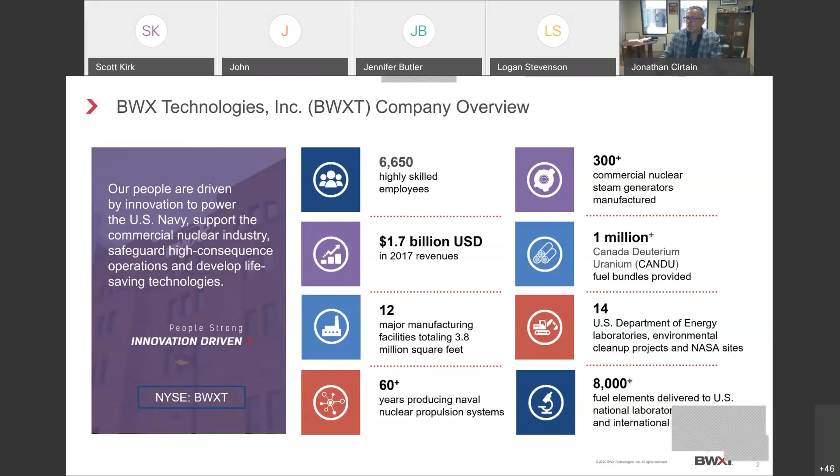So, not often do we get the opportunity to speak about this, but over the course of our history, not only have we been making nuclear reactors for the U.S. Navy for 60 years, but we have about 40 different nuclear reactor designs that we've developed over the course of that same period. Some of these were actually in submarines, like the first Rickover submarine, the USS Nautilus.

But there are also a variety of other reactors, including, Scott, I don't know if you knew this, but we had 3 reactors here in Lynchburg, Virginia, the CX series that we operated at the Mount Athos facility. We've developed designs for a variety of different reactors, both commercial and government use.

And a couple of those in particular I'm going to talk about today: Space Nuclear Thermal Propulsion System, the SNTP program, SNAP 100, JIMO, or the Jupiter Icy Moons, NASA's Project Prometheus reactor system. And we've done a variety of other things for reactors as well, including the manufacture of fuels for the Advanced Test Reactor at Idaho National Lab, or the High Flux Isotope Reactor at Oak Ridge, things that we have as ongoing enterprises today.

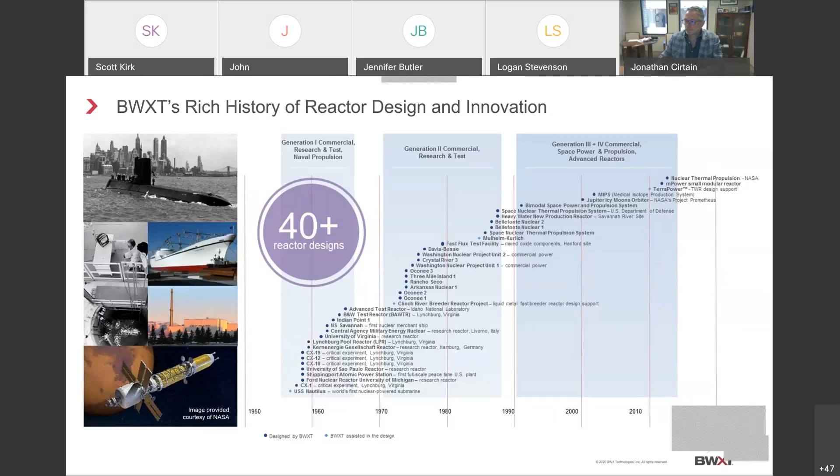So I think with that, I'm going to provide a brief history of what BWXT has done in terms of spaceflight systems since we really got into the business with Project Mercury, one of the first rocket launches to successfully reach space back in 1959. With Wernher von Braun in the early 60s, we started the development of the design systems for the NERVA test program and Project Rover. Those are 2 separate activities within the U.S. government, and we were a participant in both.

BWXT predominantly makes big round things for nuclear reactors, and we contributed big round thing manufacturing to both the Apollo space program and also Skylab. So we've been building hardware for space for quite some time, something that we don't get to take full marketing value for very often. So I'm pretty excited to get to tout those experiences to you today.

We've had a variety of different contracts with NASA for the design of thermal propulsion systems for space. One in 1987, another one in 2003, and then our most recent as part of the NASA Nuclear Thermal Propulsion Reactor Design Concept, which started within the Space Technology Mission Directorate at NASA as part of a game-changing development program. This is a funding opportunity within Space Technology's Mission Directorate. That's a GCD, Game Changing Development. We've been working on that since 2017, and that's an ongoing activity for us.

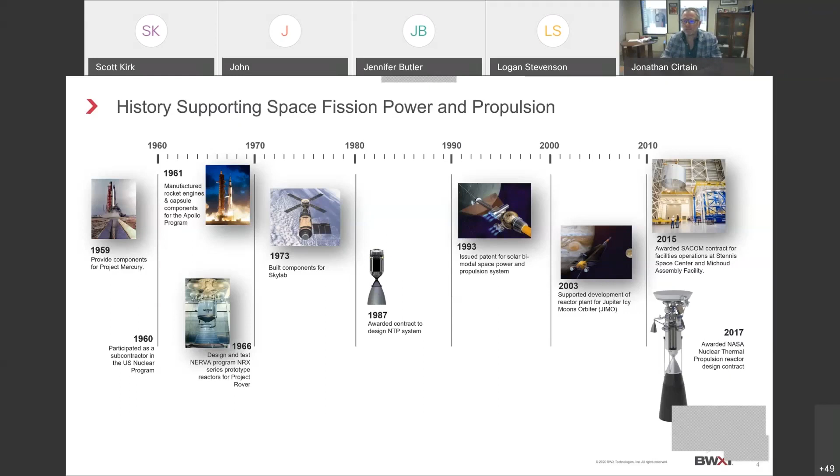Right now, we're making fuel for that effort, and I'll talk a little bit more about the current iteration of nuclear thermal propulsion as NASA sees it in my following slides. So, just the need for space nuclear propulsion.

So one of the things that didn't really come out in my bio is my background in physics is really astrophysics, where I had the opportunity to study the sun and its atmosphere during my days within NASA. And something that doesn't come across that often for public consumption is that the sun actually has variability. It has its own seasons, if you will, over an 11-year cycle, where there's variability in the number of sunspots on the sun's surface. Those sunspots are representative of the magnetic field of the sun, and that magnetic field emergence actually drives what's known as space weather.

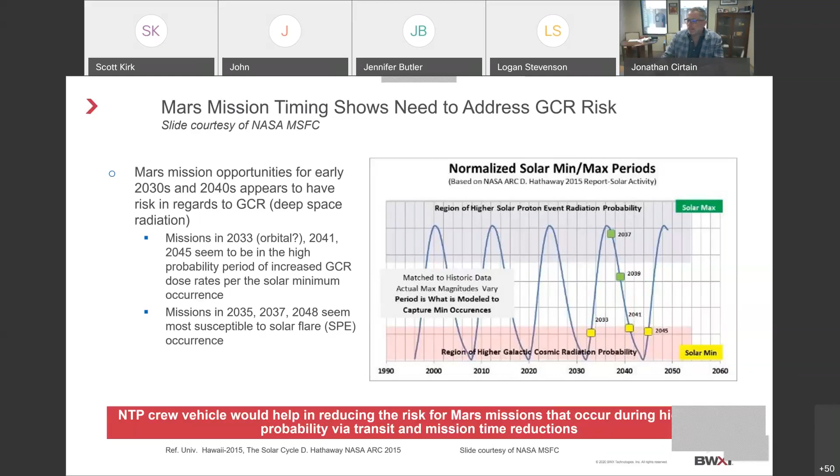Another reason, probably evident from this plot, but I'll go into it in detail. Another reason for a nuclear thermal or electric propulsion system is launch windows, right? Being able to launch on the day that you like to plan. In the case of a nuclear thermal propulsion system, you might need to plan 5 or 8 years in advance, maybe even a decade in advance of the launch window, given the proximity of Mars to Earth. The launch windows are fairly narrow.

If you watch the Perseverance launch, they only had a few days that they could launch that vehicle. So they really had to hit their target, be ready well in advance. They had to hope that the weather worked out. And so the launch windows are fairly narrow for these interplanetary launch opportunities. And as the window grows, the amount of propellant required also grows because of the interchange between the gravity wells between the two planets, launch opportunity, transit times, distances between the planets. All of those things increase the amount of propellant required.

And at day 0 of launch, if you are actually to hit your target window, you need about twice the chemical propellant, twice the fuel for a chemical rocket versus a nuclear rocket. But as the time period past that 0-day launch window grows, there's a slow growth in fuel requirements for a nuclear rocket, but a growing geometric requirement for fuel for a chemical rocket. And you can see at about day 50, day 60, it really starts to become a fairly rapid growth in chemical fuel required versus nuclear fuel required.

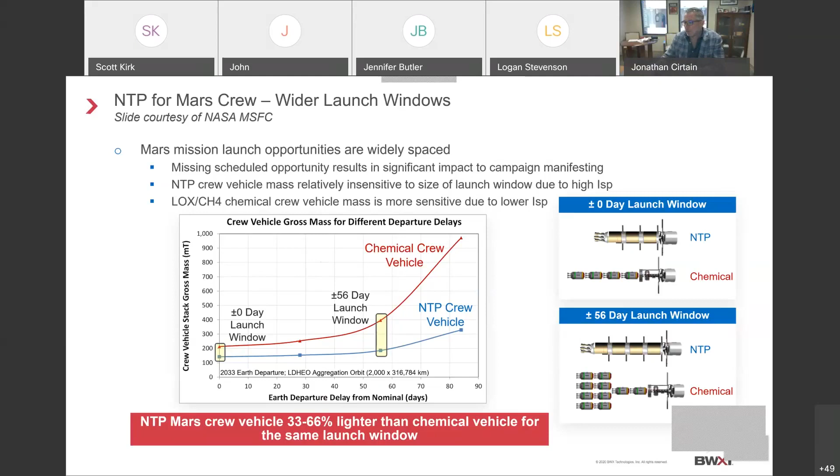So again, another rationale for having a nuclear propulsion system is the expanse in launch window opportunity that advanced rocket system affords you. Another reason for that is safety, abort, the ability to turn around if things don't go well. Most incidents occur during ascent, during the first phases of operation of the system. And it'd be really great if in the event something went wrong, you could turn around. But for a chemical system, you have about 5 days, 5 days out of 210 that you can call do-over and turn around and go back to Earth. But for an NTP system, you're roughly halfway into the transit where you can still turn around and safely make your way back to Earth.

There are a variety of different reasons why you might need to abort. Maybe the two crew members just don't get along well. The likelihood of that's probably low, but other things like damage to the spacecraft because of debris events or ECLS impacts, ECLS being the environmental and life support systems on board the spacecraft. For a variety of different reasons, you might have an issue with life support systems and need to turn around, and the consequences of all of those rationales for turning around are pretty deleterious for such a long duration mission. And so having the opportunity to abort is pretty important. So a much more substantial abort capability with nuclear thermal propulsion.

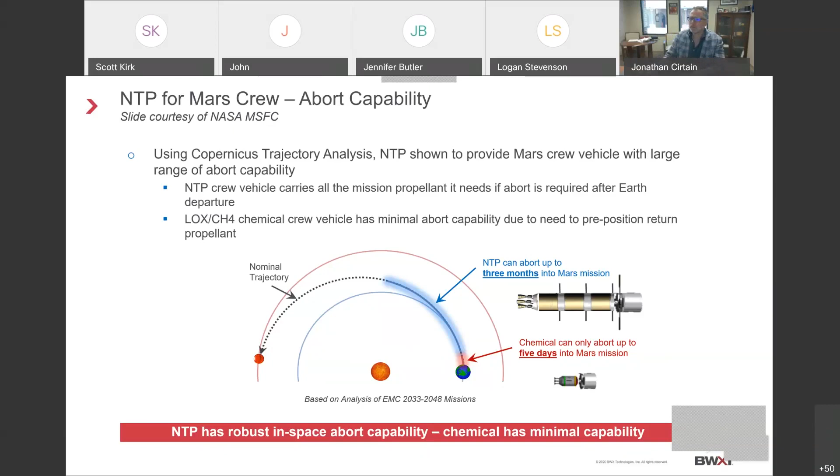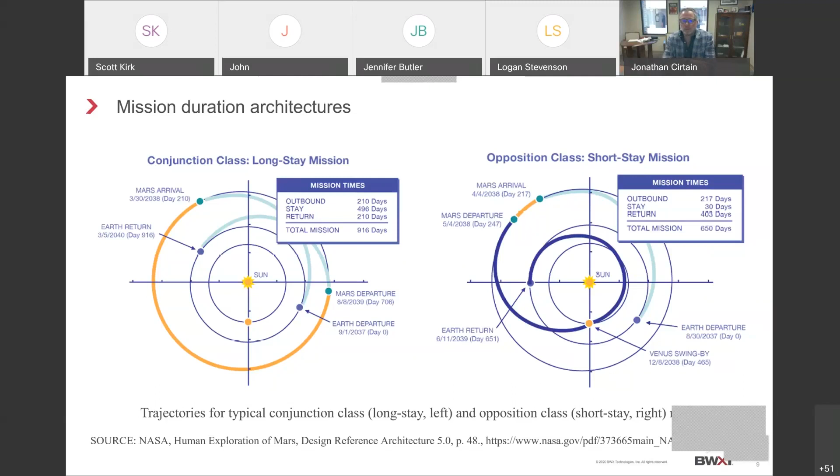On top of just the reactor concept development, we've also been looking at licensing support. So what would be necessary for licensing the manufacturing of the fuel, what's required to launch a nuclear reactor system from Cape Canaveral, what's necessary for a ground test, if we were going to test this rocket either at the Stennis Space Center in Mississippi or out in Idaho at the Idaho National Lab. In either of those instances, a license would be required to operate that reactor for those ground tests. We've been working on fuel and core fabrication development.

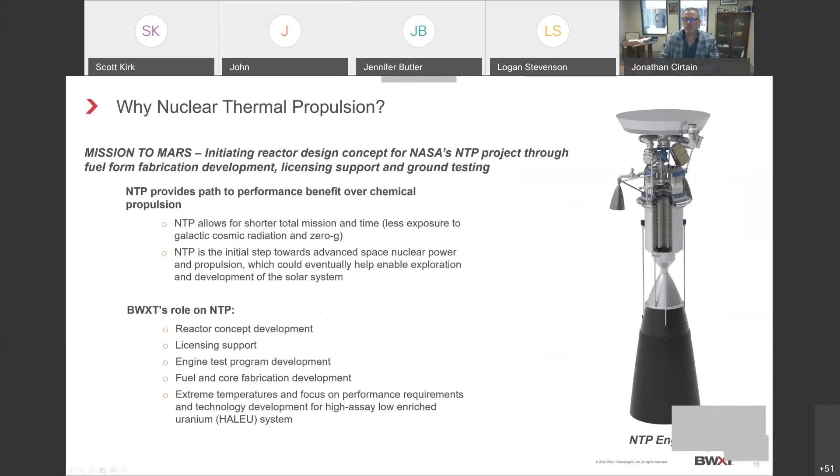Going back again a slide, it exits the reactor core and is pushed through this nozzle. So the pressure differential from above the nozzle to inside the aft skirt creates substantial increases in thrust. And so you get a high thrust, high velocity exhaust gas pushed out through that nozzle throat, through that neck in the engine. And so that's essentially, in a nutshell, how a nuclear reactor creates thrust. Generally speaking, it's heating hydrogen gas from 19.7 Kelvin to somewhere north of 2500 Kelvin.

You can think about the power of a reactor, the amount of thrust the reactor can create, being proportional to the diameter, the power of the reactor. So number of megawatts in the reactor core is directly proportional to the amount of thrust, to the number of pounds of thrust that the reactor can provide.

The ISP, the fuel efficiency of the reactor, is directly proportional to the temperature of the expelled propellant. So as the temperature goes up, the fuel efficiency goes up, the ISP goes up. So the higher the ISP, the more fuel efficient you are, the higher the thrust, the more power you can deliver to accelerate the spacecraft. Those two things in combination are one of the real benefits to a nuclear reactor.

The designs that we've been working on are north of 150 megawatts, even as high as 500 megawatts for the reactor core. That gets you somewhere between 35,000 and up to 75,000 pounds of thrust, depending on the configuration of the engine. And then the designs call for in excess of 2,700 Kelvin for the expellant temperature of the propellant. And so that gets you fuel efficiencies or ISPs north of 900 seconds.

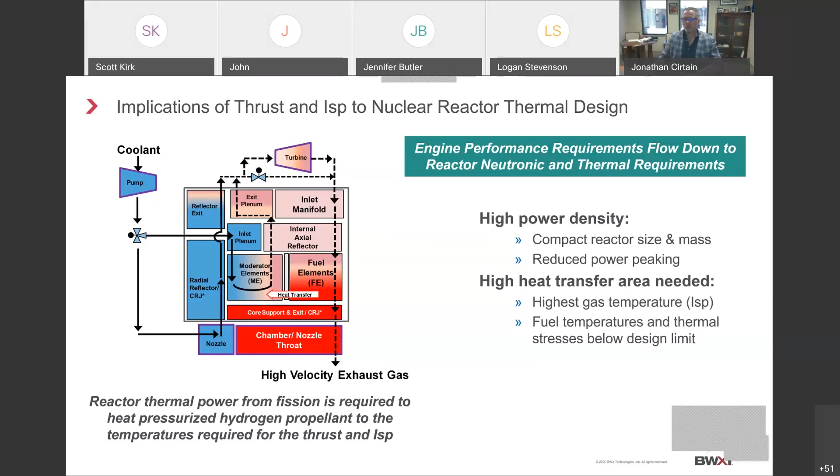So there's a lot that goes into the design of a reactor, and just going through a little bit of that, you can see the overall design on the left and the different types of physics that need to go into that reactor design. There's thermal hydraulics, exactly how does fluid flow and how is it heated as it's transferred through the different channels of the reactor core.

What does the neutron profile look like inside the reactor core? How many fission events are you creating as a function of position, both in diameter and length of the reactor? And how does that reactivity, how does that heat impact the structural mechanics of the system?

Are you getting expansion of the reactor core? Are you getting cracking of the materials? What are the various implications associated with both the transfer of heat into the fluid, the thermal hydraulics, or the creation of heat through the fission events, the neutron physics? And how do you maintain reactivity as a function of time, as a function of burn rate?

And that's all done, in this case, with control drums, reflectors. Those are the discs in the yellow annulus that surround the core. You're actually rotating those to change the neutron reflectivity at the outer diameter of the reactor to make sure that you're keeping the neutron flux, the K effective, at the right level to maintain reactor control.

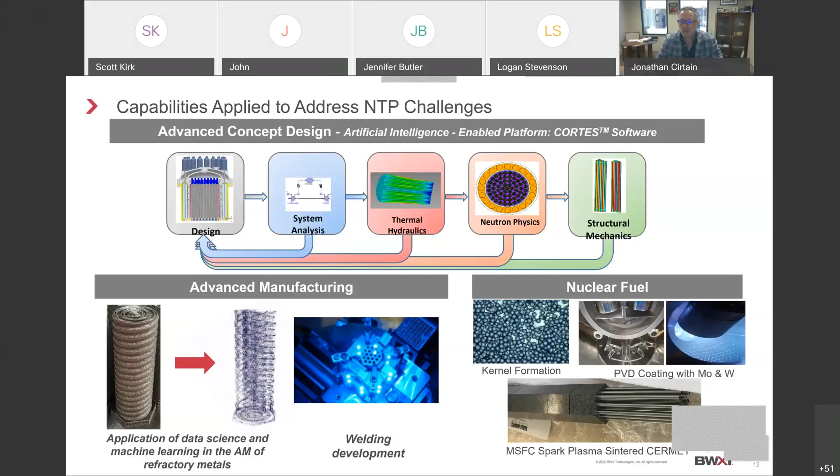So just more on fuel. Like I said previously, the ISP is directly proportional to the exit temperature of the fuel, the max fuel temperature. And so a variety of different fuels are being looked at because of their performance in both temperature, how high you can operate those, but also exposure to hydrogen, because some of these things don't do all that well when exposed to hydrogen over time.

And so you can get hydrogen infiltration into the material, which then causes some of the constituent materials inside those fuels to make their way out. And that's not necessarily good. It's also more often than not bad. So you want to make sure that you can make things that don't break down either at temperature or when in the presence of a hydrogen environment. So a lot of tests are ongoing here. Those different fuels will make up fuel elements.

Given that it's high assay LEU, you really want to make sure that you get the right amount of energy transfer from the neutrons into the reactor core. You slow the neutron, you change the neutron spectrum so that you minimize the number of fast neutrons and maximize the number of thermal neutrons so that you have a thermalized reactor core, getting the most energy transfer out of the neutrons into the reactor core, and then from the reactor core into the coolant, the hydrogen.

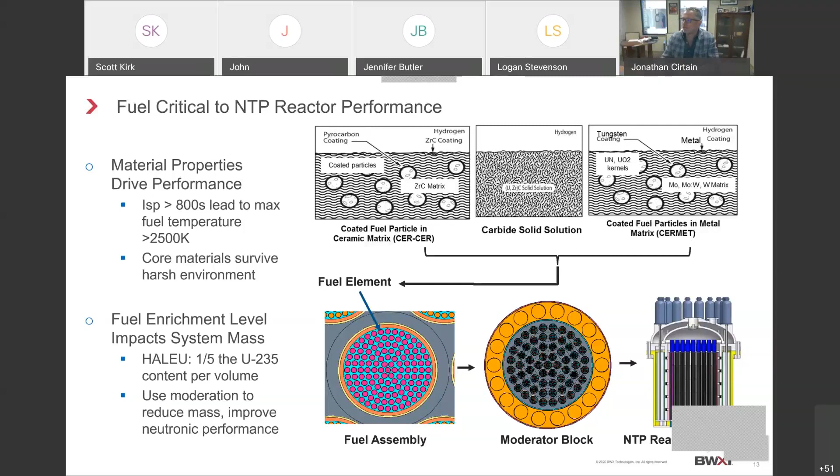So once you've got a design, you have to figure out how to maximize a variety of different parameters. A lot of that design margin goes into the moderator material. Is it a zirc hydride? Is it a yttrium hydride? Is it some other material? What do you make the reflector out of? Is it beryllium? Is it B4C that you use as a poison? How do you manufacture the control drums? These are all different parameters that you have to consistently match with a variety of the different options that you have in the design process.

Once you've decided on a fuel, then that fuel is going to inform the cladding material that you would use. The cladding material has to interact with the moderator and the coolant. So a lot of different things factor into the overall design. And once you start making some of these decisions, there's a pretty comprehensive test program that you have to go through that's going to demonstrate the efficacy of the material choice, but also the manufacturing choices.

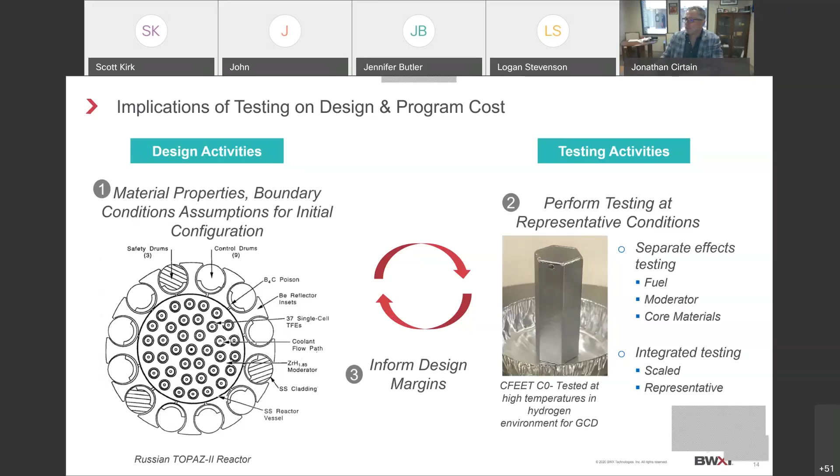Can you manufacture welds that don't crack in these environments? And do you have stress relief processes that can make those welds strong and not brittle? So a variety of different things have to be tested along the way, and that's the intent of this slide. And really what we've been doing with NASA since we started the early R&D that we began back in 2017.

And so we've been doing a lot of different characterization on these types of welds, both using non-destructive engineering techniques, ultrasonic, X-ray, CAT scan, 3D tomographic imaging, but also destructive engineering, cutting these things up and putting them under a microscope and really interrogating the quality of the weld, both in depth and cross-section, to understand what they look like,

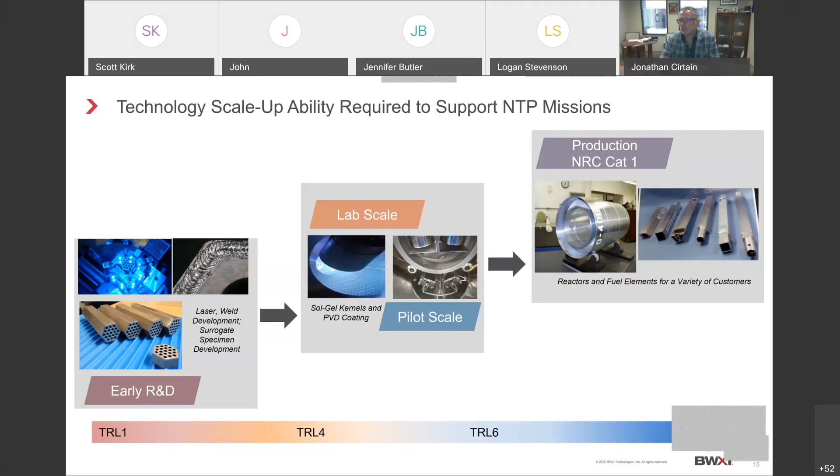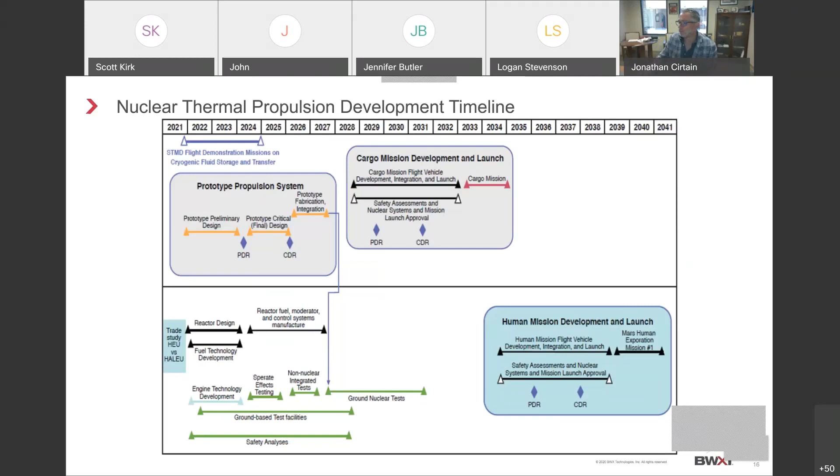And so you can see that if you want to get going on one of these missions for human exploration of Mars in 2039, you kind of got to get going right away to make all of this work, in a way that you'd have the necessary infrastructure in place on the ground for testing, the necessary infrastructure in place on Mars for receipt of humans some number of years later, and then the necessary test systems completed for the eventual development of a human-capable launch or a human-capable spacecraft system that you would begin building roughly a decade from now.

If instead you didn't want to do nuclear thermal propulsion because you wanted to go to even higher ISP, even higher fuel efficiency, you could use what's called nuclear electric propulsion. Now, this is very different in terms of the propellant that's used. In this case, you're using a nuclear reactor core to actually produce electricity. A lot of electricity, megawatts of electricity.

That electricity is then used to accelerate a noble gas, something like xenon or xenon doped with helium. You can store xenon at very high pressure, so you can store a large volume of xenon or helium-doped xenon, and you can get 3 to 4 times the fuel efficiency that you can get out of a nuclear thermal propulsion system. So you would operate this for a much longer period of time. It would fire for a much longer period of time and get you to a much higher terminal velocity.

So you might operate this the entire transit from Earth orbit to Mars orbit, and you actually use it to decelerate as well. So firing this for 200 days, whereas a nuclear thermal propulsion system you're going to fire for 10 to 15 minutes, then coast, then flip the system around and decelerate for 10 to 15 minutes so that you get captured into Mars orbit. In the nuclear electric case, you would fire the engine the entire time. So you're constantly accelerating, so you can reach a much higher velocity, a much more efficient use of energy.